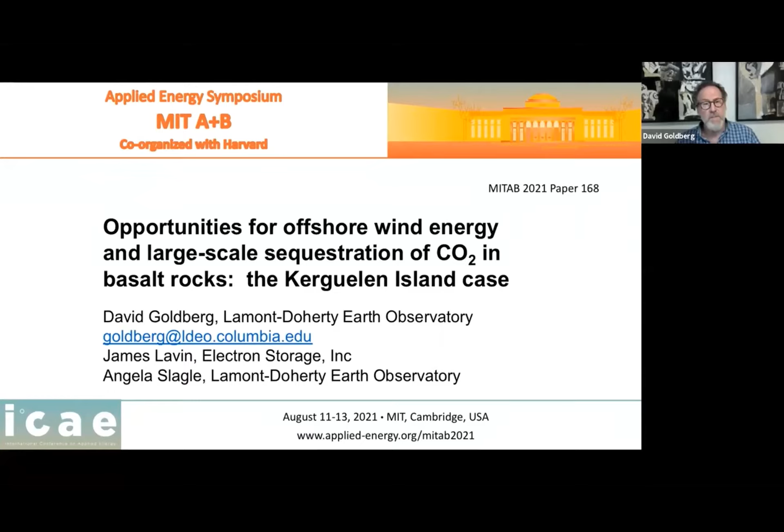The outline for the talk will be first to present some negative emission technology motivations and the background information about carbon mineralization, which is also a negative emission technology, and a mechanism to store CO2 safely for long periods of time in solid form. Looking also then at the technologies available to us today for direct air capture of CO2 and the potential for offshore storage of CO2.

This leads us to look at the very large potential at the Kerguelen Islands themselves, and in particular the wind energy resource that is available there, and combining that with capture and storage needs to make this, if you will, a wind carbon capture hub. And then some concluding remarks about where this research has led and what the implications and trade-offs would be for designing this kind of solution for mitigation of climate on a global scale.

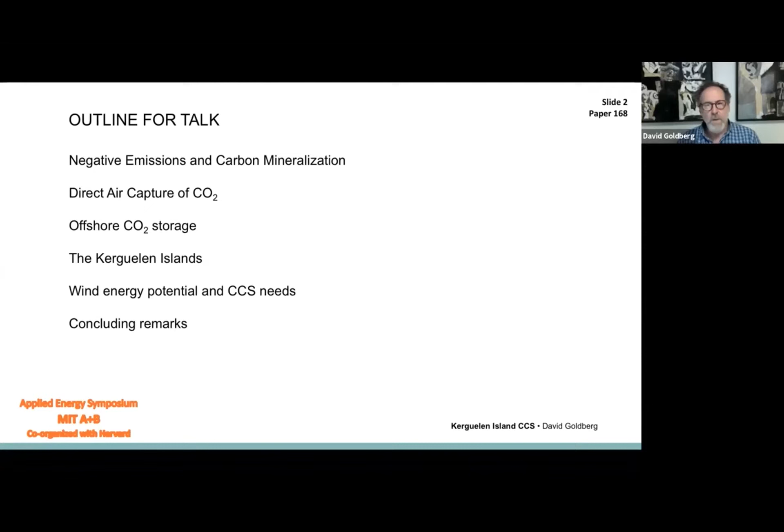So motivations for negative emission technologies and the targets that have been set by the IPCC, the Intergovernmental Panel on Climate Change, will require hundreds of billions of tons of CO2 to be removed from the atmosphere, not emitted to the atmosphere, in order to meet net zero targets by mid-century. This assumes that major technological and behavioral changes will happen in our use of energy and our emission rates, as well as the development of negative emission technologies, tools that allow us to remove CO2 from the atmosphere.

Those are required in any scenario because of the need to reduce hard to avoid emissions, such as those from long haul air travel or certain manufacturing processes, such as cement and steel production, and also to accommodate any delay in achieving those efficiencies and reductions in emissions, which is sometimes referred to as overshoot. To do that, the emissions would be in the atmosphere and would require to be removed, thus the negative emission name. And that is indeed something that might reach 5 to 10 billion tons of removal required by NET technology over the century.

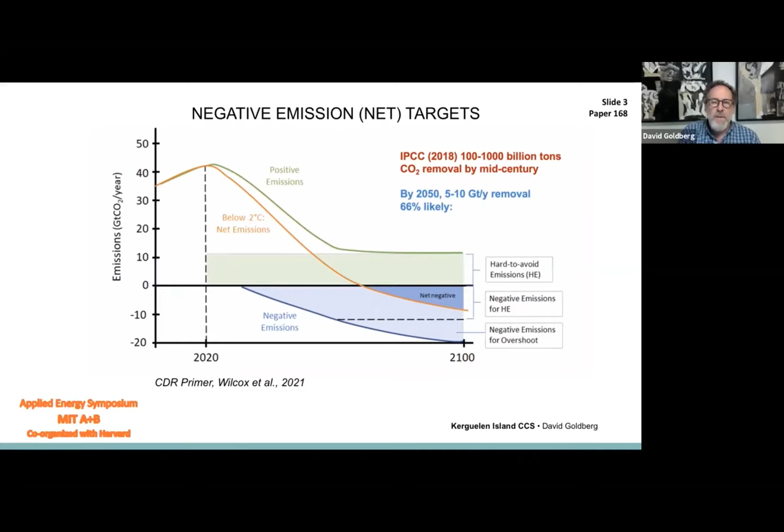And there are engineered solutions, such as the mineralization of mine tailings, which react in a very similar way, capturing CO2 and storing it in permanent mineral form, typically in carbonate.

So the approach here is primarily an engineered one, and we're looking particularly at the direct air capture technologies, which are systems that basically enable CO2 to be scrubbed from the air, and the capture process itself takes relatively low concentration CO2, say 420 ppm CO2 in the atmosphere and ambient air, which is then driven across a contactor surface, and CO2 free or CO2 depleted air is returned to the atmosphere. A stream of fairly pure CO2 is then available for use for other purposes or for storage.

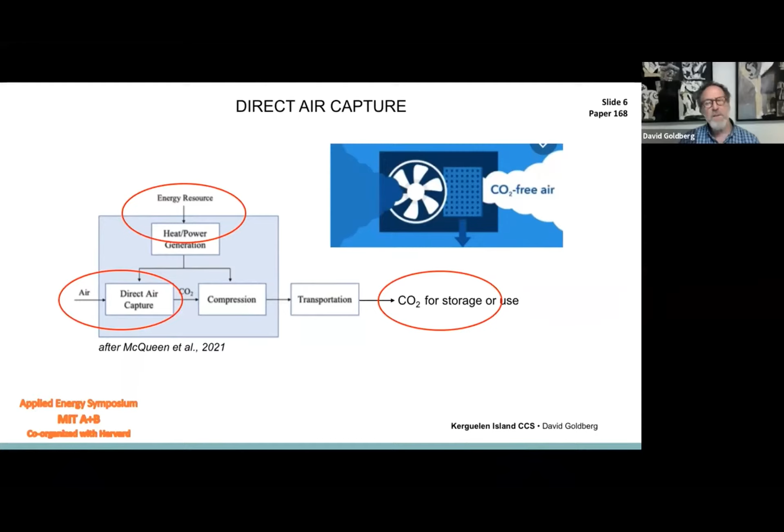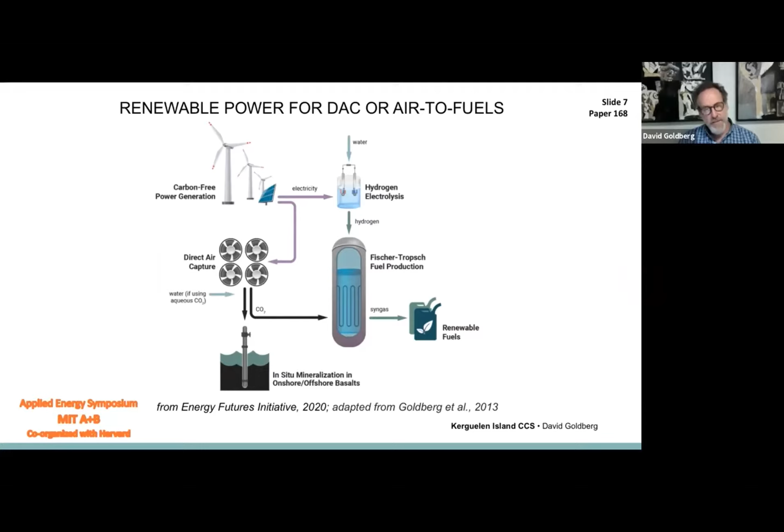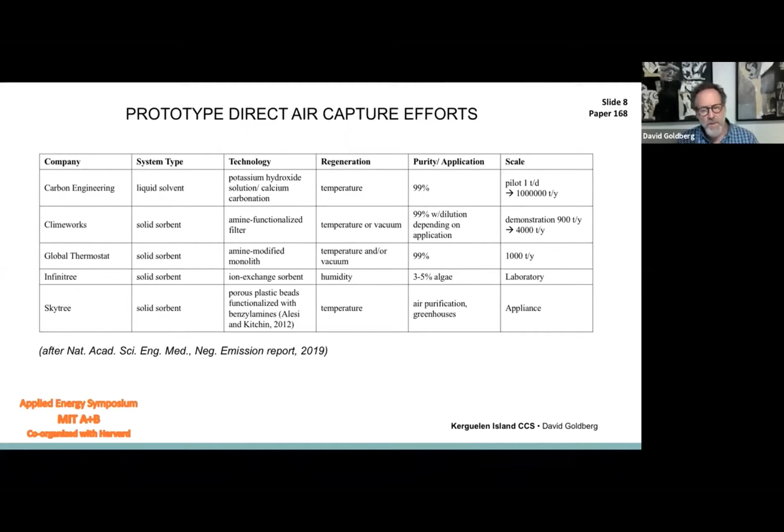And there are a number of commercial ventures that have been undertaken in other countries using similar, related, as well as new technologies, developing new approaches to directly capture CO2 from the air. And these are all viable, but we're concentrating on the existing plant, prototype and demonstration phase products with two of the techniques that will be discussed here on the following slides.

The first one is described as a liquid solvent system. This is analogous to the Carbon Engineering approach. And in this case, the direct air capture is accomplished by forcing air across a reactor with liquid alkaline solutions, such as potassium hydroxide, which is absorbed in a reactor and precipitates calcium carbonate. That calcium carbonate then requires a significant amount of energy in a calciner, a high temperature kiln, essentially, to remove the carbon dioxide from the carbonate, producing a carbon dioxide stream, and returning the calcium hydroxide to the solution in a recycling process for another cycle of capture.

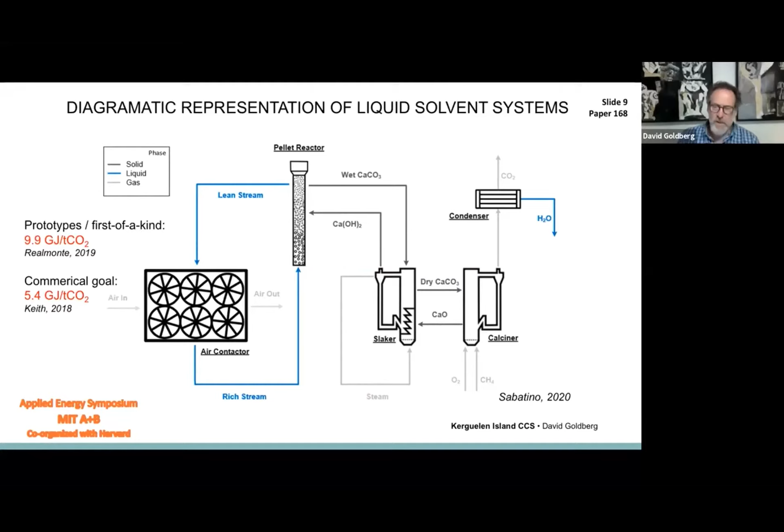In solid sorbent systems, these are systems that absorb CO2 from ambient air on a solid framework, usually with amines or amino groups that are on that solid framework. They also require air to be driven across that filter, and also require a significant amount of energy to regenerate the CO2, regenerate the filter for the recapture cycle and production of a CO2 concentrated stream.

These systems are not unlike the systems that have been used for many decades in air purification systems, for example, in aircraft or in submarines, and function not unlike a catalytic converter in an automobile. The process of driving the CO2 off of the filter can be done in a variety of different ways, through changes in temperature, pressure, changes in humidity, or a combination of the above. And new developments here are, again, active.

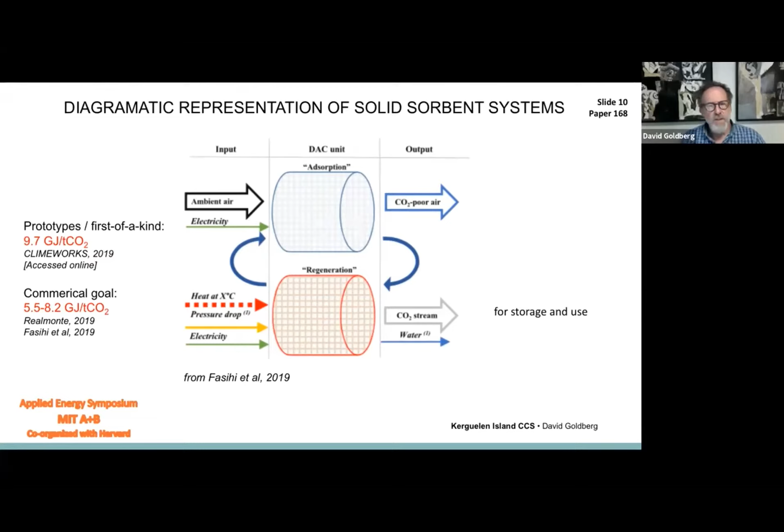Recent work has shown first-of-a-kind examples in the field to require about 9.7 gigajoules per ton of CO2 produced, with a commercial goal approximating half of that, about 5.5, maybe slightly less, 5.5 gigajoules per ton of CO2 produced. And as mentioned, there's a number of active commercial ventures looking to improve both materials as well as the efficiency of the energy regeneration process.

One of those combined approaches is illustrated here. This utilizes simply a heat pump and a vast resource of cold water, or in this case seawater, to regenerate a solid sorbent system, driving CO2 off a collector, and using the heat pump system to freeze CO2 out as dry ice, and be quite efficient in terms of the energy requirement.

This may cut the requirements again by a factor of 2, to as low as 2.3 gigajoules per ton of CO2, and other combined systems looking at electrochemical combinations, electrification of the system, may drive the energy requirements even lower. These have been developed and continue very actively to generate a system that may in the future be much more effective, or at least twice as effective as what we're assuming in this study.

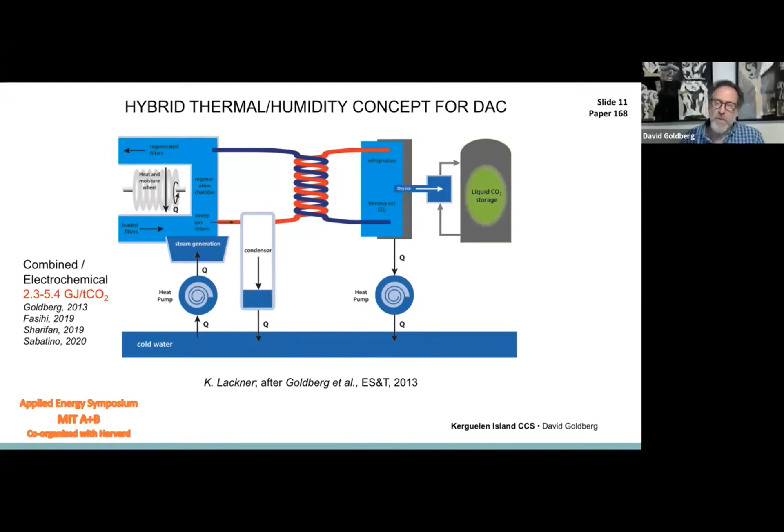We are using the commercial goal as our target estimator for the amount of energy used, about 5.5 gigajoules per ton of CO2 produced with the current prototype DAC systems. So this is entirely a theoretical model.

The example I want to point out is a project in Iceland where CO2 is being captured from a geothermal power plant using waste energy and energy from renewables locally to inject that CO2 into basalt rock on land in the area. This is the CarbFix project, and the CarbFix project illustrates the ability to both inject and convert that injected CO2 into carbonate minerals in the basaltic rock below the plant in Iceland.

The direct air capture unit is from the Climeworks system. This is the solid sorbent framework system, which has been added into the project and piggybacks, essentially capturing CO2 from the air and co-injecting that with the CO2 from the power plant and local groundwater.

Moving this active prototype project to the nearshore and offshore environment will require that the source of CO2 be expanded significantly, such as the direct air capture systems being greatly expanded, as well as a source of energy beyond the geothermal power plant to drive both the capture and the injection.

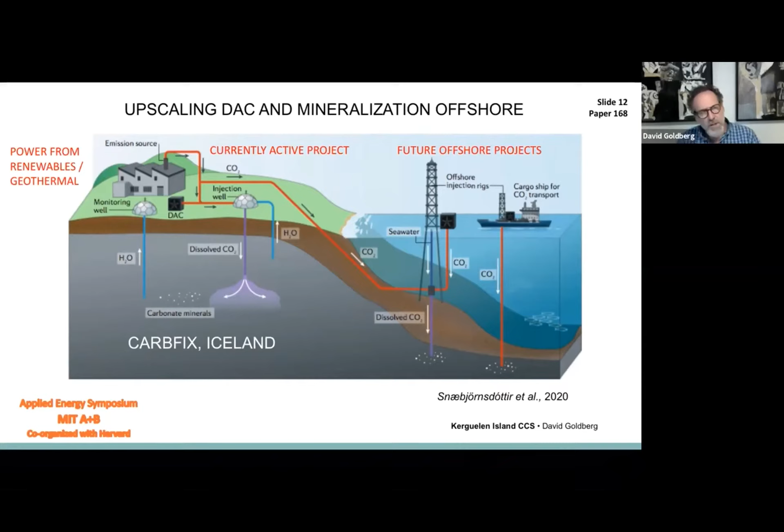But even the variability at these locations and the differences in mean wind speed of about 30% less than at Kerguelen account for something like a factor of 3 less net potential power available from the wind flows at Kerguelen. They're also some of the most usable and dense sea level air in the world that exist without heavy snow or temperature extremes. Although the temperatures are relatively stable, they are cold, and the relative humidity is also stable but humid.

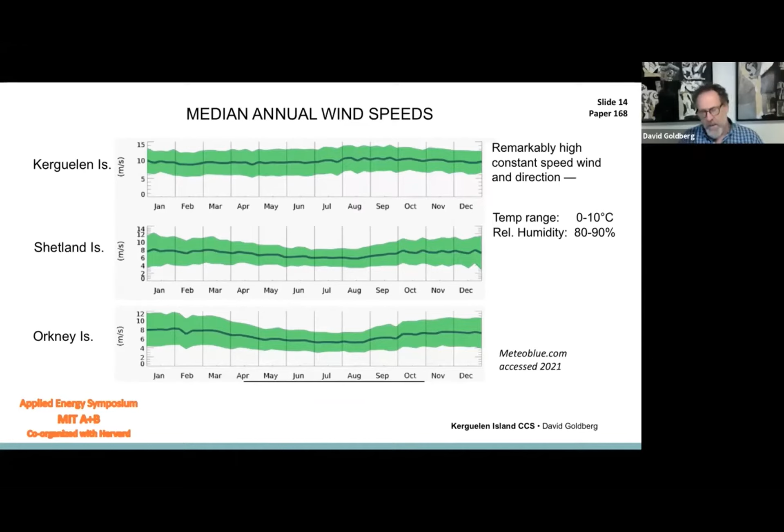And these contours were chosen corresponding to basically the tripod and anchored existing offshore turbine systems to date, capable of about 50 meters water depth, and floating and tethered systems that are starting to be installed fairly widely around the globe, capable of reaching water depths of up to 100 meters.

So using these two approximations as reasonable areas, we calculate net area of about 1,400 square kilometers at the 50-meter depth and about 4,000 square kilometers at the 100-meter depth for potential installation of a large wind farm. These are large wind farms. In fact, even the 50-meter depth wind farm is about the size of the largest planned wind farm in the North Sea, and considerably offering greater wind power because of the steady and high wind speeds.

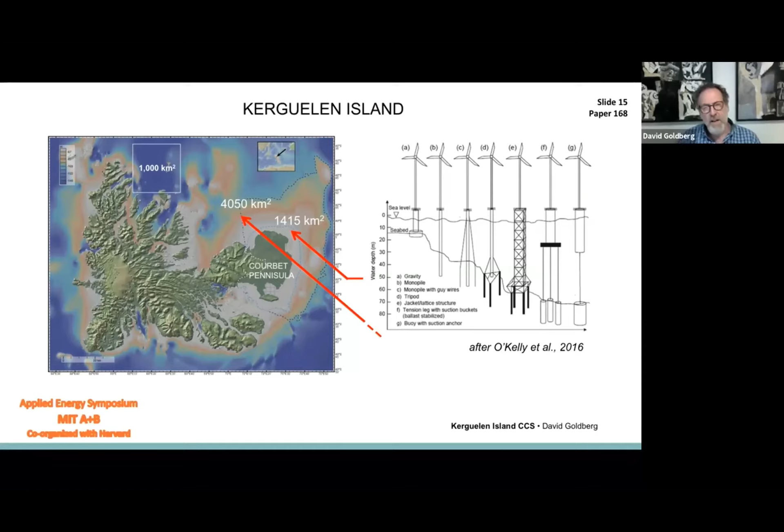So using those calculations, we were able to make some assumptions about our capability for producing wind power with current technology. We assume 15 megawatt capacity for turbines, with roughly 1 to 1.5 turbines per square kilometer installation. That turbine size could be optimized with more detailed analysis of the location and what is easily deployable in this location. But the consistent and steady strong wind speed let us assume a fairly high power availability, a turbine with low intermittency of about 67%.

This is a bit higher than offshore wind farms to date, about a third higher, but the assumptions based on the wind speed and direction make this a reasonable, if optimistic, parameter to apply here. So given our calculated area for 50-meter water depth, 1,400 square kilometers, we calculate 125 terawatt hours of potential energy, or 21 gigawatt faceplate capacity. And for the 100-meter water depth, 4,050 square kilometers area on and offshore Kerguelen, 356 terawatt hours, or about 61 gigawatt faceplate power potential from wind.

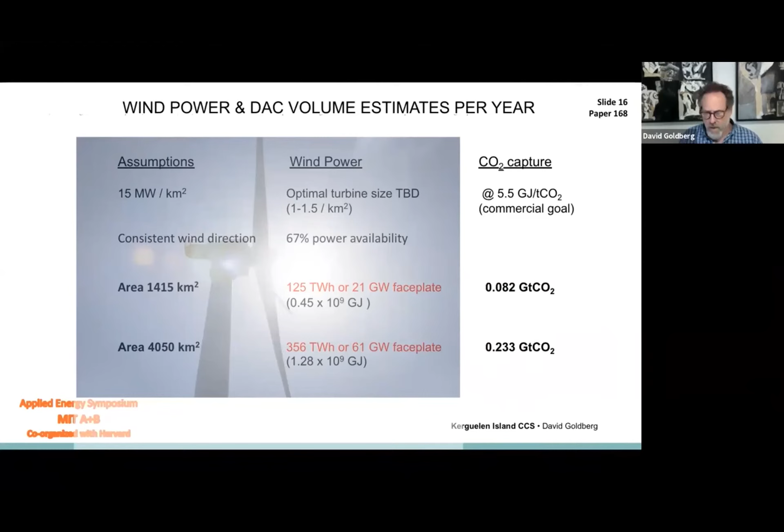So with that takeaway, we also looked a bit further at what would be required in terms of land area for an installation of a capture farm to achieve a quarter of a gigaton of capture per year with the wind resource at Kerguelen.

And we use assumptions made in the development of planning for the Carbon Engineering system, which designs essentially a contactor wall with 20 meters height, and we assume that there is 10 times that distance in an array of walls per kilometer, that the contactor area in the wall is 2/3 of that full area, and that the efficiency of contact for capture of CO2 is about 75%.

That leads us to the published values for capture efficiency per meter square of contactor surface with the system of 22 tons per meter square per year. And that's about a tenth of the volume flux of CO2 through a system like this in Kerguelen, where wind speeds are assumed to be about 10 meters a second on average.

So with that assumption, we calculate 158 square kilometer capture farm area would be needed. And it is notable that it could be placed on land adjacent to the wind farm on the Courbet Peninsula, and that this is an area, as shown by the box, of about a 13 by 13 kilometer box if it were designed in that location.

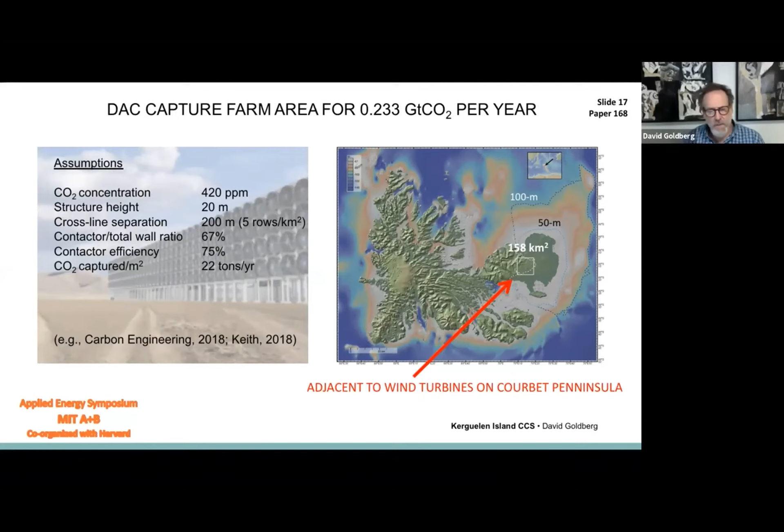That has evolved over 100 million years of sequential depositions of basalt lavas. And the storage capacity estimated from previous studies of scientific drilling is that 1,500 gigatons of CO2 could potentially be stored in this location with fairly conservative reservoir capacity assumptions.

And with the even further conservative assumption that only 1% of that capacity were available, the quarter gigaton of CO2 captured with the direct air capture Kerguelen wind hub could be stored for 60 years or more. And storage would occur very much in a manner similar to what is being conducted at the pilot in Iceland, where injection into porous basalt aquifers would convert CO2 in time, with water, into carbonates, being solidly and permanently stored.

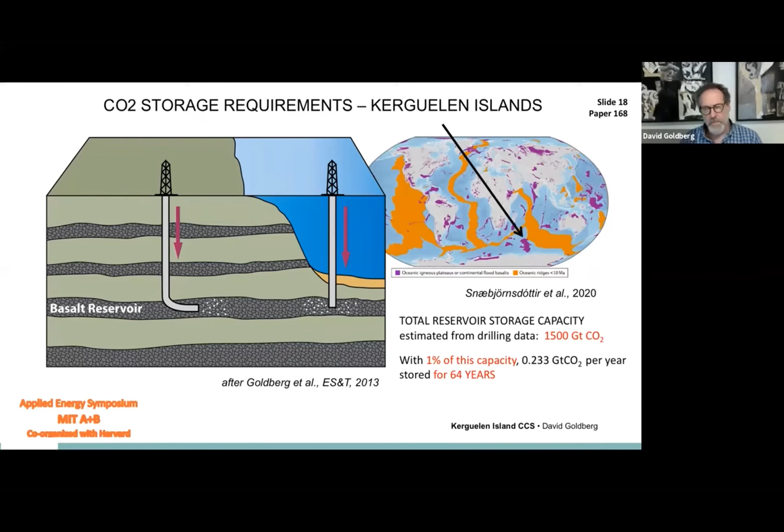So to conclude, this study has looked at the notion of combining massive wind energy resources with current technology and prototype-stage technologies for direct air capture and basalt storage with mineral carbonation as a negative emission technology in a very remote place, the Courbet Peninsula in particular, and the shallow surrounding seas in the Kerguelen Islands.

We calculate with our evaluation that energy and capture infrastructure could be used to cover a very large area, 4,000 square kilometers, to net 1/4 of a gigaton of captured CO2 per year, with virtually unlimited potential for storage of that CO2 in the nearby underlying basalt formations.

Interestingly, there are essentially no competing agriculture or energy needs for that potential wind energy near Kerguelen, which allows us to make full use of a wind carbon hub for climate benefit. And it gives us some perspective on what it would take to install systems of this nature. Four systems or more of this size and quality would be needed to capture a gigaton per year.